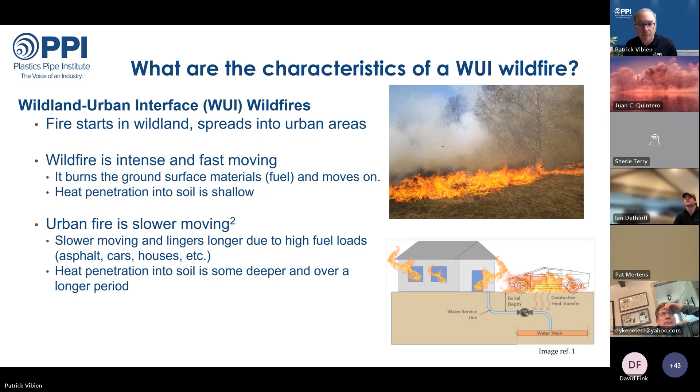So PPI has two publications that we want you to be aware of.

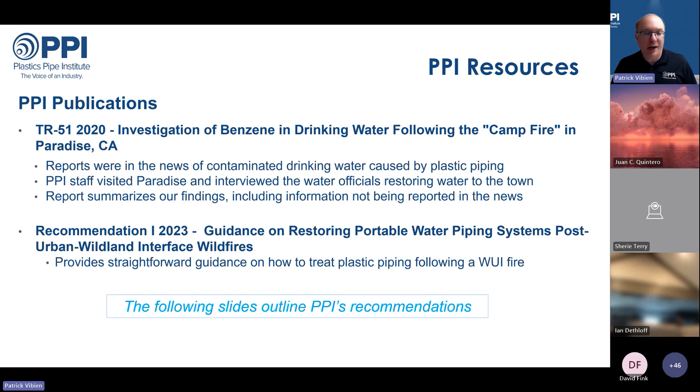So above ground, what's the impact? By above ground, we mean non-buried exterior piping and inside building piping. In the case of it being exposed to fire, plastic piping will char, melt, deform, or burn.

Even metal piping may be affected, as we saw evidence of premature corrosion, and metal that could also have been affected in visible ways. So the short and long-term performance of the piping following heat exposure is unknown.

So what does PPI recommend in terms of above ground piping? Well, recommendation I says potable water piping systems and components that have been exposed directly to high heat or flames should be replaced. This recommendation applies to all piping materials, including metallic piping. Regardless of the material, long-term functional capabilities may be compromised. If in doubt, replace it.

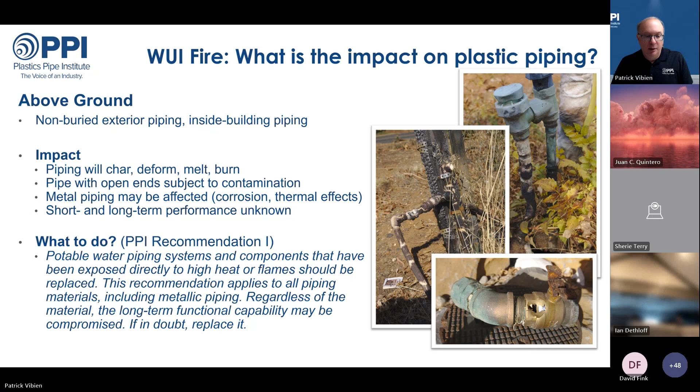So what about below ground? We may need, in this case, to distinguish between pipe that transitions from above ground to below ground, and from very shallow buried pipe to deeply buried pipe. The impact of the wildfire will depend on the depth of that piping and the type of cover. Piping that transitions from above ground to below ground will likely be damaged by heat and fire.

The common practice is to bury pipe below the local frost line. So properly buried piping at depths greater than 12 inches should not melt or burn. So what does PPI recommendation I say? It says any piping or component buried less than 12 inches, as well as piping transitioning out of the ground, should be examined and considered for replacement.

Any piping or component showing direct heat exposure as evidenced by melting, distortion, leaks, or smoke staining should be replaced. These recommendations apply to all piping materials, including metallic piping. Regardless of the material, the long-term functional capabilities may be compromised. If in doubt, replace it.

Now let's talk a little bit more about that piping that is buried more than 12 inches. Studies have shown that deeper piping should not be affected by the heat that is being conducted from the surface through the soil. The studies show that the heat penetration, even in the urban environment, is very limited because the temperature is heavily attenuated with soil depth.

But as you increase the depth, the pipe wall temperature decreases quickly. And at 0.3 meters, which is 1 foot or 12 inches, you can see the pipe wall temperatures reach under 100 degrees C for a short time in the worst case scenario, and significantly lower temperatures in most cases. So typically a service lateral that's buried a foot or deeper and a main that's buried even deeper really isn't going to see elevated temperatures.

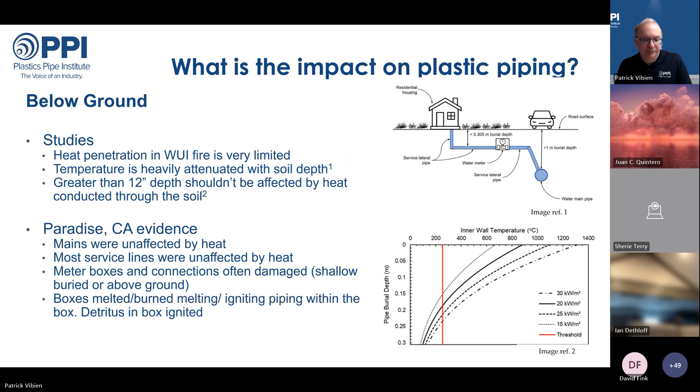So what about the reports of contamination? Post the Paradise and Santa Rosa fires, actually, there were reports of potable water coming from pipes contaminated with benzene and other volatile organic carbons. The concentrations were above the EPA health limits for drinking water. It proved very difficult to flush these service lines to effectively reduce the concentration of those contaminants to safe levels.

We don't dispute these observations. There were also reports that plastic piping was able to absorb and then release contaminants back into the water, and this probably is the case. There are also reports that the source of contaminants was the burning of plastic piping, and this is where we take exception and dispute those reports.

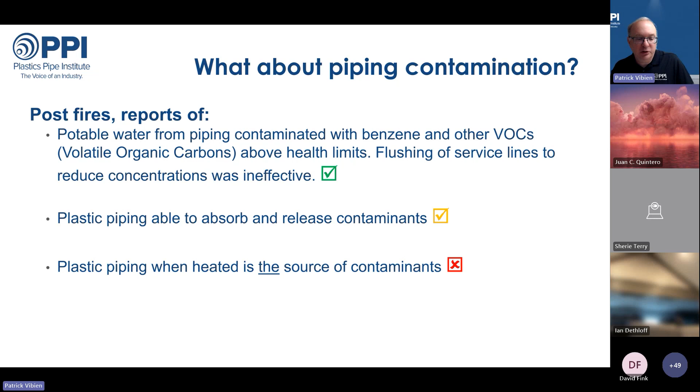So let's look at our experience from our investigation of the Paradise, California fire and what is detailed in PPI TR 51. This really applies to both the Camp Fire in Paradise in 2018 and the Tubbs Fire in Santa Rosa, also in California, in 2017. Both were basically massive wildfires that spread into and decimated residential areas. Both these towns are located in foothills in California.

In both cases, the piping systems lost pressure and water was siphoned out of the piping system. This is called a negative pressure event. Sometime after the fire, when they were trying to put the water system back into service, they tested the water and found trace levels of benzene and other VOCs that were above EPA health limits. The limits were exceeded in both the mains and service lines. Interestingly, the location of the contamination appeared random, and neighboring buildings could see completely different results.

Importantly, contamination was found in water that was coming through both plastic and metal water piping. To try and resolve the situation, they started flushing the piping. Flushing the mains resolved the contamination within the mains, reducing any contamination below acceptable limits. However, flushing the service lines proved to be often impractical, as contamination would reappear once the water was allowed to remain stagnant in the pipe for a little while.

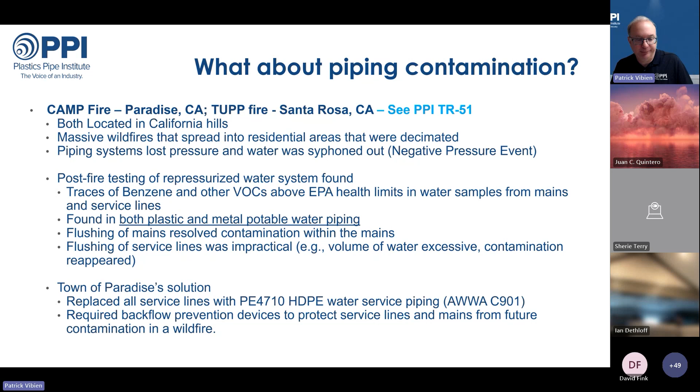So let's examine some of these claims further, starting with the claims that the benzene and VOCs were coming directly from the pipe heating and burning. This claim has been promulgated by Professor Andrew Whelton of Purdue, who, in my opinion, ignored other potential sources for the contaminants. He also did some completely unrealistic lab experiments to test the theory. In this test, he burned plastic piping samples, and unsurprisingly, these did show minor benzene VOC generation when taken to temperatures over 300 C or 570 F for extended periods of time.

Note that these temperatures are well above the melting temperatures for polyethylene and PVC, etc. He did admit in his paper that the quantities of VOC generated and extractable in his experiment couldn't explain the observed quantities of those contaminants seen in the water distribution system. He basically ignored this inconvenient fact in his findings and continued to promote piping as the source of contaminants. More recently, he's acknowledged that other sources may have contributed, but continues to promote piping as a significant source of that contamination.

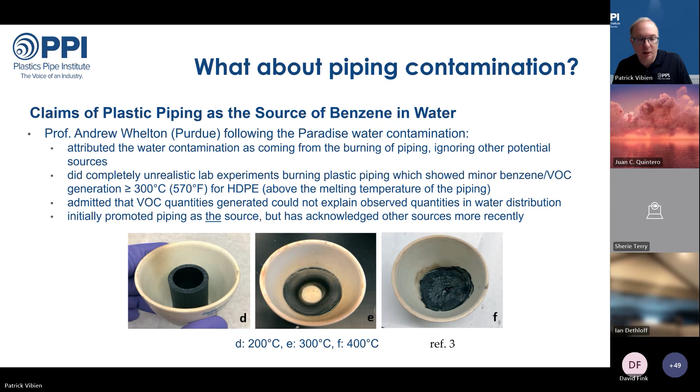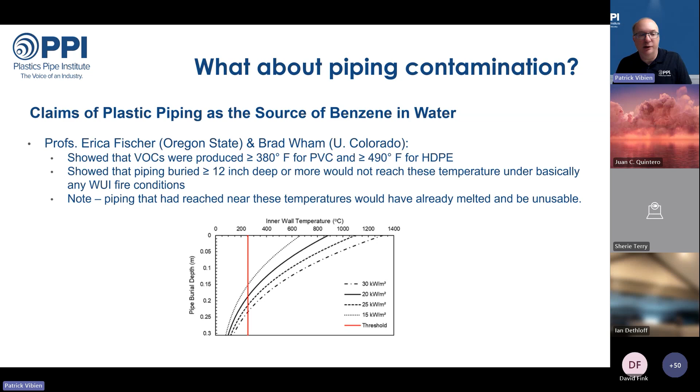But more importantly, they did an extensive analysis of the heat penetration in the soil, that I showed earlier in this chart, which clearly showed that piping buried at depths of 12 inches or greater would basically never reach these kinds of temperatures in any wildland-urban interface wildfire conditions. So again, very hot at the surface, but as soon as you get to some depth, the temperatures are really, really mitigated and not the kinds of temperatures that would produce the benzene and other VOCs.

So where is that contamination coming from? Well, logically, in a wildfire, in an urban wildfire, you have uncontrolled burning of natural or artificial organic materials. Those create benzenes and VOCs. And by that I mean like trees, lumber, fabrics, asphalts, shingles, tires, plastics, gasoline, all those things that are non-metallic can produce benzene and other VOCs if they're burned in uncontrolled fashion. And obviously in an urban wildfire, there's a lot of that.

In fact, burning of wood, like for your fire, is one of the largest producers of benzene in the environment. So the smoke and air in a fire is heavily, heavily contaminated with all kinds of chemicals. And the siphoning effect that occurred during the negative pressure events I described earlier would pull these contaminants into any kind of breaks in the piping system. Remember, the water was drained out of the piping during the fire, so the contaminants were able to be sucked

into the system. And this probably explains why the degree of contamination was found to differ significantly through the water systems, because the piping broke differently depending on where it was. And remember, both plastic and metal piping were contaminated. So the result was that during the fire, the empty mains and services were contaminated, whether they were made of plastic or metal.

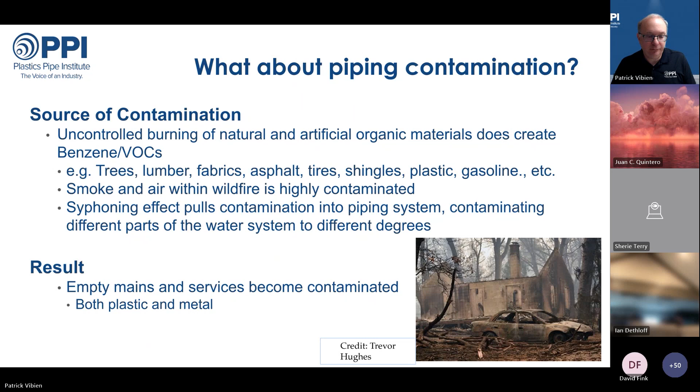Now let's look at the claim about plastics releasing these chemicals back into the water. There's probably some truth here, but there hasn't been much research done in this area in terms of what actually happens in a wildfire. Generally, plastic piping can be expected to absorb some of these organic contaminants into or onto the pipe wall. While it's a slow process, if the contaminants sat on the surface of the pipe for an extended period of time, as it did post-wildfire, before trying to be put back into service, then there might be enough time for some of those contaminants to be absorbed into the pipe wall.

Then when water was reintroduced, those contaminants could have migrated or desorbed slowly out of the pipe wall, thus contaminating the water in the pipe. When the flow is intermittent, like a service line, there is potentially time for the concentration to increase in the water. This is quite likely what was observed in Paradise. You might say that the service line should be flushed, which was done repeatedly. But as the desorption process is slow, for service lines, they found they needed to flush repeatedly for a long time to pull all those contaminants out.

This was determined to be impractical for a service line to a building due to the number of cycles and the need to get the water service operational. So they decided to replace the pipe, all service lines. When it came to mains, the continuous water flow that you would have in a main kept the concentration within acceptable limits.

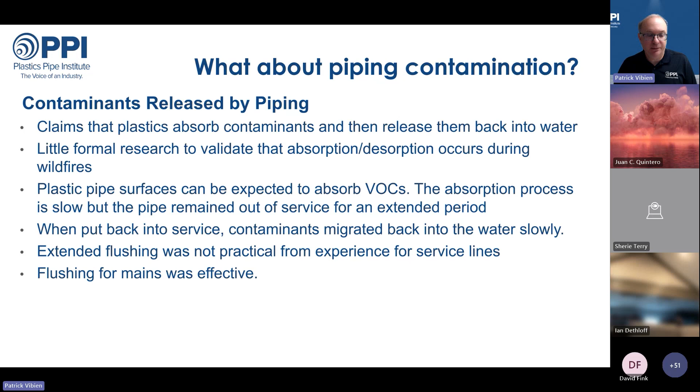So PPI recommendation I addresses the contamination, and it says flushing the water mains can be effective at reducing contamination and the VOC levels to within acceptable limits. Guidance of the water utility and local authorities should be followed. After a fire event, if a structure is reoccupied or service is restored to any occupiable structure, water should be tested for contaminants as recommended by the water utility or local authorities.

Testing should be done on a structure-by-structure basis, as contamination may appear unexpectedly within an area and may not be associated with damage to the particular structure. Flushing of small diameter service lines may not be effective or economical. In such cases, it is recommended to replace the service lines and components, regardless of the material. All service lines should be properly buried.

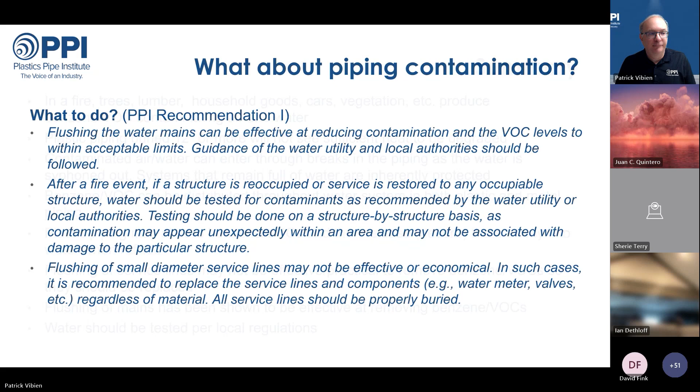So in summary, in a fire, trees, lumber, household goods, cars, vegetation, etc. produce benzene and VOC contaminated air and water. Plastic piping buried 12 inches or more will not likely see sufficient heat to be degraded. Contaminated air and water can enter through breaks in the piping as the water is siphoned out. Systems that remain full of water are inherently protected. Benzene and VOCs can be distributed throughout the water system in both plastic and metal piping.

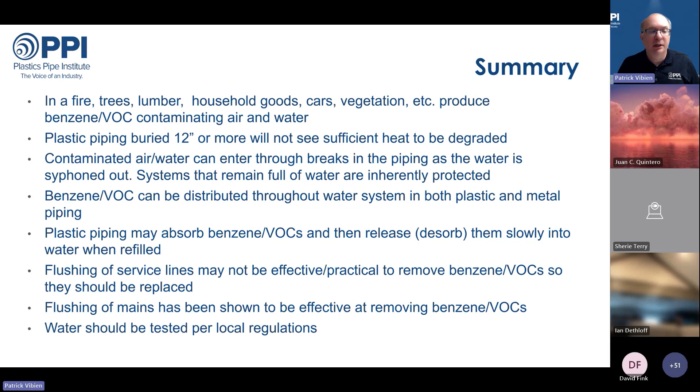Plastic piping may absorb benzene and VOCs and then release or desorb them slowly into the water when refilled. Flushing of service lines may not be effective or practical to remove benzene and VOCs, so they should be replaced. Flushing of mains has been shown to be effective, and water should be tested per local regulations.